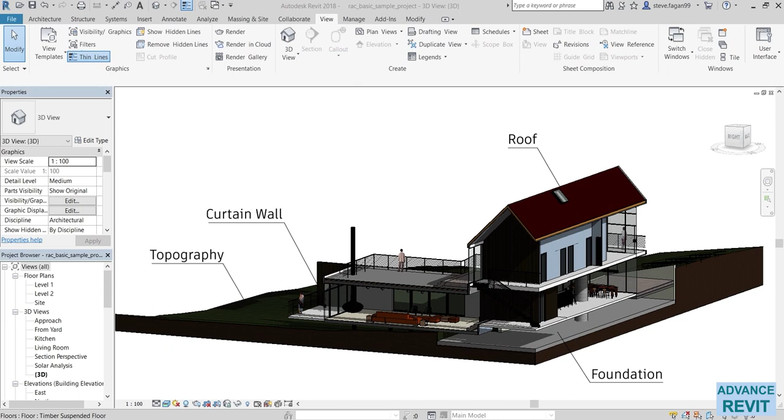Most of the terms used to identify objects in Revit are common industry standard terms. However, some terms are unique to Revit. Understanding the following terms is crucial to understanding the software.

In Revit, the project is the single database of information for your design, the Building Information Model, or what is known as BIM. The project file contains all of the information for the building design, from the geometry to the construction data.

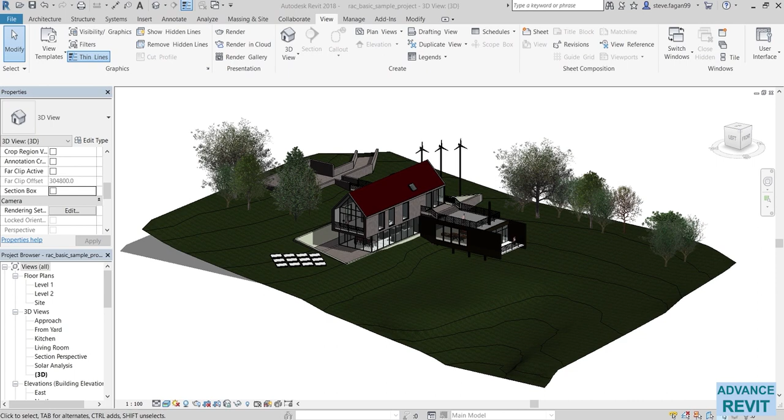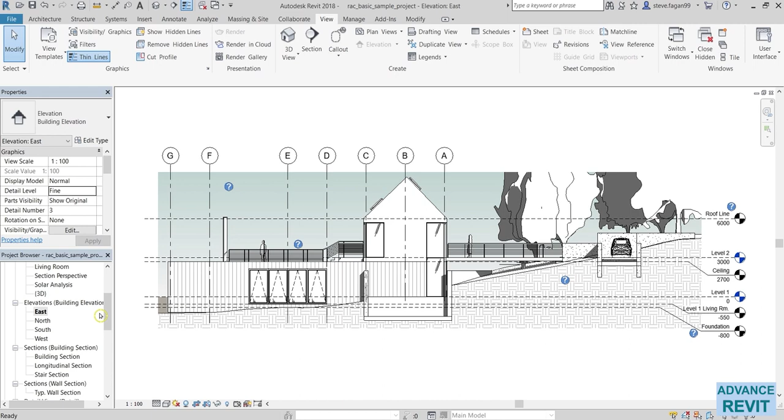This information includes components used to design the model, views of the project, and drawings of the design. By using a single project file, Revit makes it easy for you to alter the design and have changes reflected in all associated areas, be it the plan view, elevation, section views, schedules, and so forth. Having only one file to track also makes it easier to manage the project.

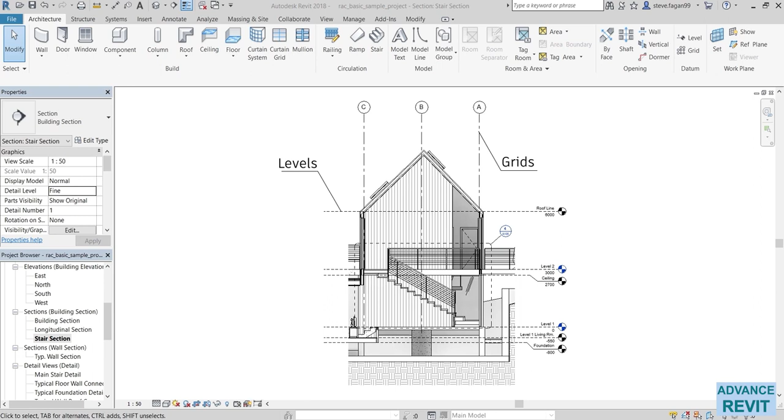You build a Revit project by adding what are called elements. Revit uses three types of elements in the project: model elements, which are doors, walls, and stairs; datum elements, which are grids and levels; or view-specific elements, which are tags, text, and dimensions.

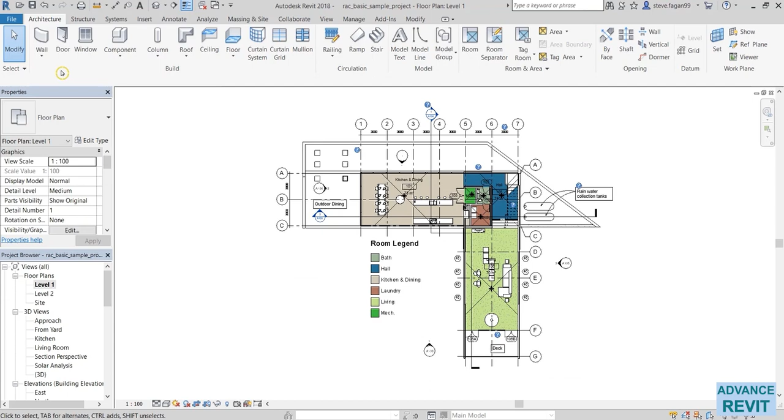Elements are then organized into groups called categories. A category is a group of elements with similar properties and functionality. For example, all of the walls in Revit are grouped into the walls category. The same applies for our doors, windows, and columns.

Each category is then further organized into what are called families. A family is simply a subgroup which further sorts the elements in a category into a specific group based on a property. For example, the columns category is broken up into a round column family and a rectangular column family.

Each family can have several types. A type can be a specific size of a family, such as a 450mm round column or a 600mm round column. These columns will have identical type properties other than the dimensions, and consequently are grouped into the same Revit family. Each time you place an element into Revit, you place what's referred to as an instance of the element.

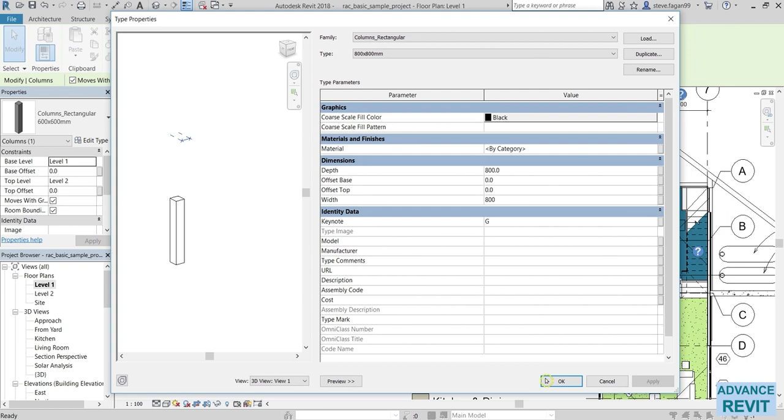Instances are the actual items, known as individual elements, that are placed into the project and have specific locations in the building, known as model instances, or on a drawing sheet, known as annotation instances. So if you have 10 columns of the same type and you want to change the properties of just one column, you can edit the properties for just that one instance, and the changes will only affect the individual element.

Still confusing? Don't worry. Everything will make sense as we progress through the course and build on our model.